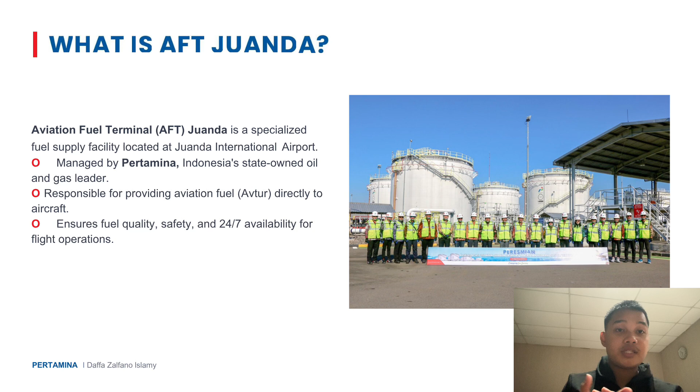At AFT Juanda, Pertamina acts as the main aviation fuel supplier. There are several important responsibilities carried out by Pertamina. First, Pertamina maintains fuel quality standards according to international aviation regulations like API and others. This is very important because aviation fuel must meet strict specifications before being used by aircraft.

Second, Pertamina manages fuel logistics, including fuel transportation, fuel storage like a warehouse, and fuel distribution like a bridger or refueler. Third, Pertamina ensures safety and operational reliability. Every process must follow standard operating procedures to avoid contamination, accidents, or fuel shortage. In addition, Pertamina continuously improves efficiency and service quality to support airport operations.

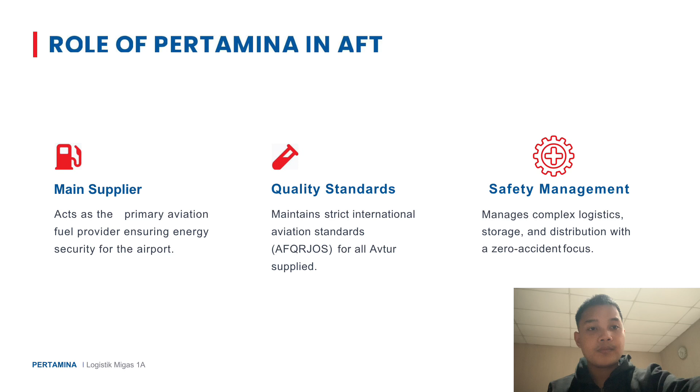Let's move on to the next slide. Now, let us discuss how the AFT Juanda system works. The process starts from the fuel supply. Fuel is supplied from refineries or fuel terminals. After that, the fuel is transported to AFT Juanda using pipelines, tank trucks, or ships.

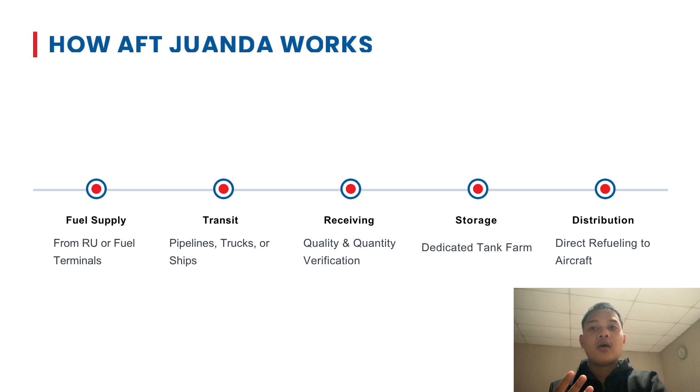When the fuel arrives, there is a receiving process. During this stage, the fuel is checked for quality, quantity, and cleanliness, ensuring there is no contamination in the product. Then the fuel is stored inside dedicated storage tanks. Finally, the fuel is distributed to aircraft using refueling equipment, such as a bridger, refueler, or hydrant system. This process must be conducted carefully to ensure that the fuel remains safe and uncontaminated.

Okay, let's move on to the next slide. This slide explains the fuel storage system. AFT Juanda uses large storage tanks, such as fixed roof tanks and floating roof tanks. These tanks are equipped with several important systems.

These include the filtration system, water separation systems, and monitoring instruments. The filtration system helps remove impurities from the fuel. The water separation system prevents water contamination because water can damage aircraft engines.

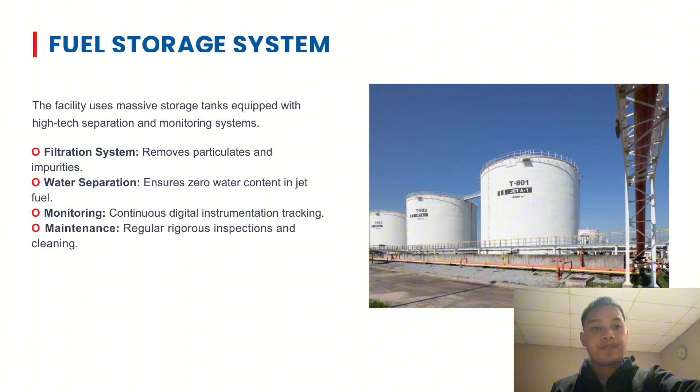In fuel distribution operations, AFT Juanda uses several types of equipment. The first is the hydrant system. This is an underground pipeline system directly connected to an aircraft parking stand. The hydrant system is efficient because fuel can be transferred directly to aircraft without using trucks. The second equipment is the refueling truck or fuel truck. This vehicle is used for aircraft that are not connected to the hydrant system.

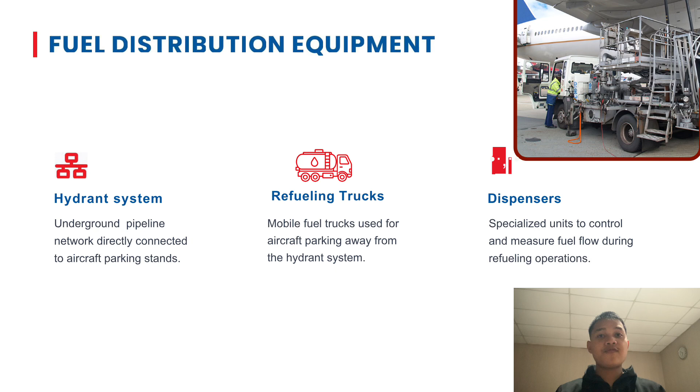The third equipment is the dispenser. The dispenser controls and measures fuel flow during the refueling process to ensure accurate fuel quantity. These systems work together to support efficient and safe aircraft refueling operations.

Now I will explain the refueling process. The first step is preparation and safety checking. Operators inspect the equipment and ensure safety conditions are met. The second step is fuel quality testing.

The fuel is checked for density, contamination, and water content. The third step is connecting the equipment to the aircraft. After that, fuel transfer begins according to required fuel quantity. Finally, the operator conducts final inspection and documentation to confirm that the refueling process is completed safely and correctly. This process requires accuracy because fuel errors can affect flight safety.

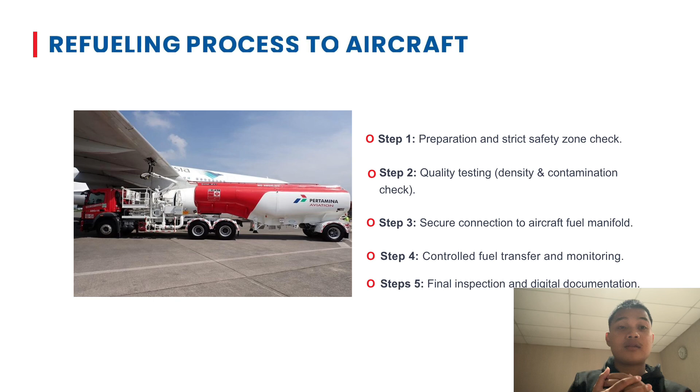Let's move on to the next slide. Safety and quality control are very important in aviation fuel operations. AFT Juanda follows strict aviation fuel standards and procedures. Several safety activities include regular fuel sampling, laboratory testing, equipment inspection, and the fire protection system. In addition, all personnel receive training related to operational procedures, emergency response, and occupational safety. The objective is to minimize operational risk and maintain fuel quality at all times.

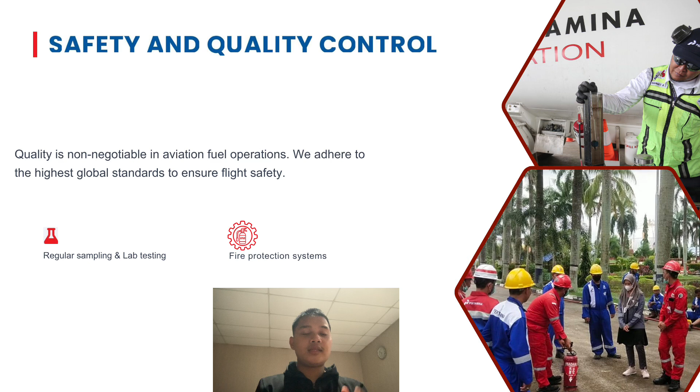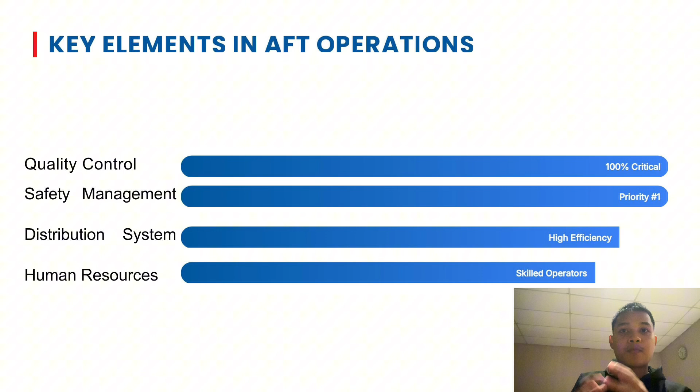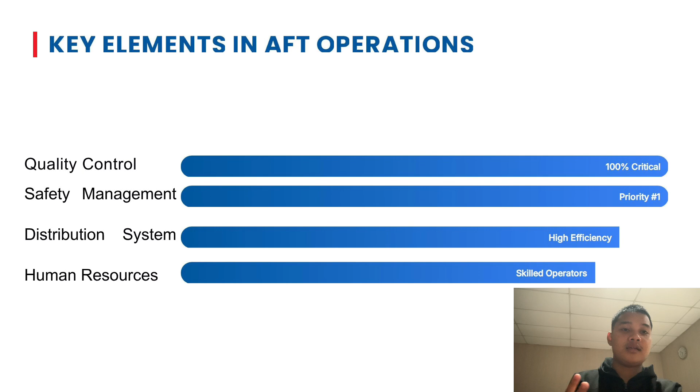Another important element is quality control, which guarantees fuel meets aviation standards. Then there is safety management, which protects workers, facilities, and aircraft operations. Finally, human resources such as operators, technicians, engineers, and HSE play a critical role in maintaining smooth and safe operations.

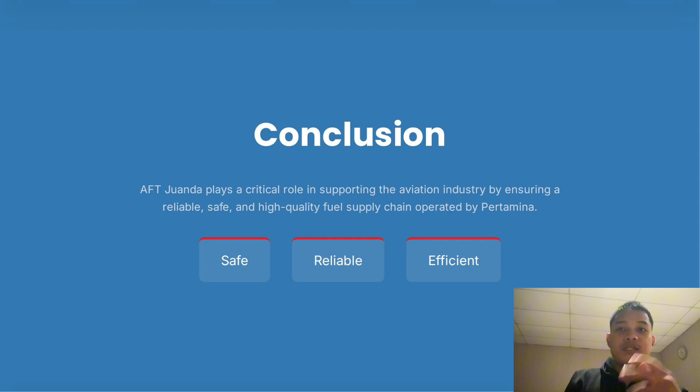In conclusion, Aviation Fuel Terminal Juanda plays a critical role in aviation operations. AFT Juanda ensures that aircraft receive safe, clean, and reliable fuel supplies. The facility is operated by Pertamina with high operational and safety standards. Good fuel management is essential because aviation safety depends not only on aircraft technology, but also on fuel quality and operational reliability.